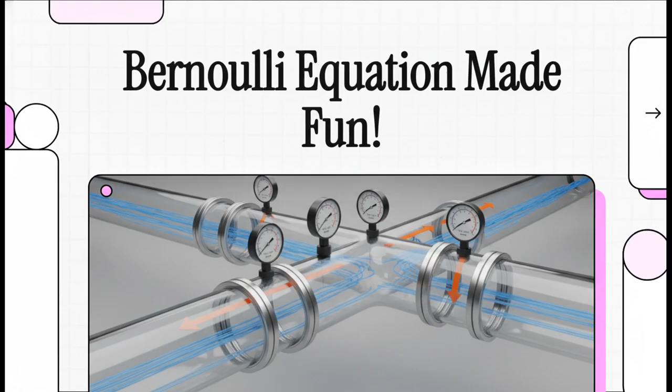Think about this for a second. How does a heavy airplane actually fly? I mean, it's a literal massive metal machine, right? Weighing hundreds of thousands of pounds, packed with people and luggage, and yet it just gracefully lifts off the runway and glides through the air. It kind of feels like magic.

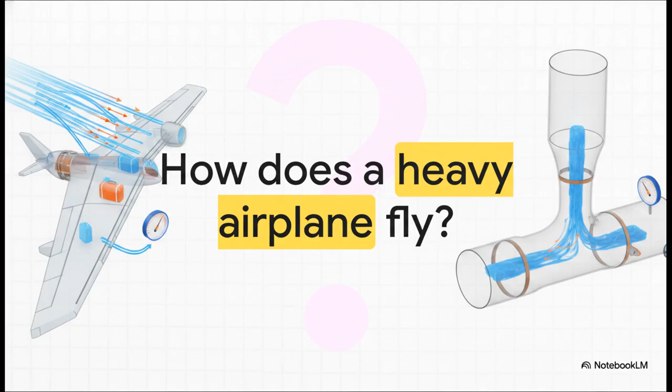But, well, the secret isn't magic at all. It's actually down to a remarkably simple rule of fluids. And the best part? To understand it, we don't even need to step foot in a lab or a wind tunnel. Section 1. The water slide effect. Instead of a lab, I want you to imagine we're heading to a water park. Picture yourself at the very top of a massive water slide.

Now, pay attention to the physical sensations of that ride, because they perfectly map to the three types of energy we're tackling today. So first, you start way up high, right? Just by standing up there at the top of the stairs, you have high potential energy. Then you push off.

As you speed up, rushing down that slide, your kinetic energy, that's your energy of motion, goes up, and all the while, you can physically feel the water pushing around you, right against your body. That push, that's pressure energy. So we've got potential, kinetic, and pressure. Just hold on to those three ideas for me.

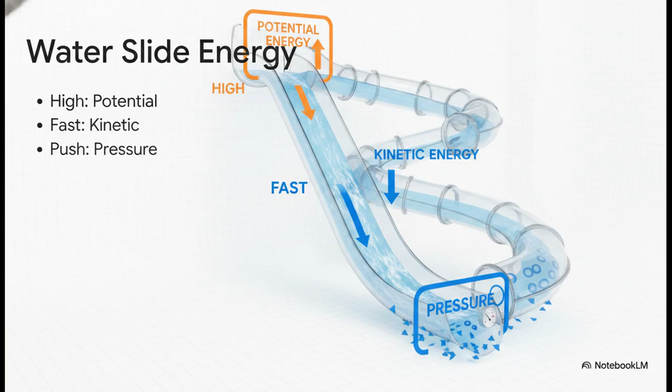And that brings us straight to Bernoulli's equation. In plain English, it just says that the total energy stays exactly the same, as long as no energy is lost. It's kind of like a perfectly balanced budget. On that water slide, your potential energy, your kinetic energy, and your pressure energy, they're constantly shifting and trading places with each other as you twist and drop.

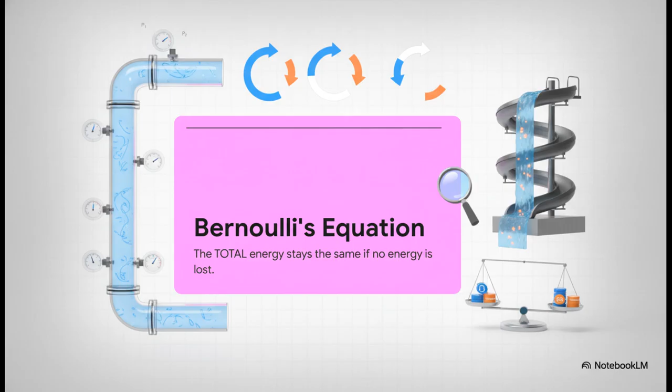But if we pause time and add them all up at any given moment on that slide, the total sum of those energies remains perfectly constant. The whole shebang stays balanced. Which brings us to Section 2, the PVH memory trick.

Now, if you crack open a textbook, you're going to see this terrifying formula: P + ½ρv² + ρgh = constant. Whew, I know, just looking at a bunch of Greek letters and squared variables is enough to make anyone's brain want to shut off. But remember, this massive formula literally just represents the pressure energy, kinetic energy, and potential energy we just felt on the water slide.

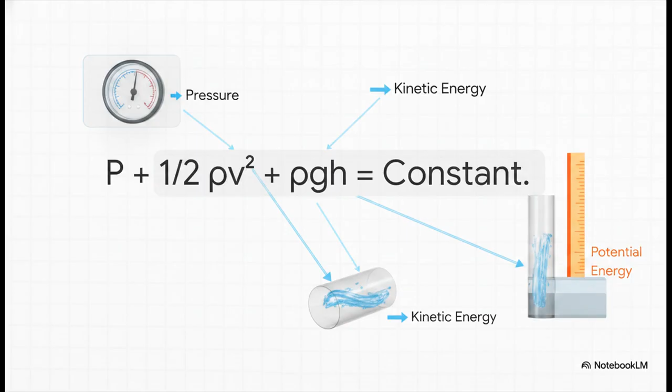And like I promised, we are going to simplify this right now. We are going to ditch the scary algebra and break this down using a super simple memory trick. PVH. P stands for pressure, V stands for velocity, which is really just a fancy word for speed, and H stands for height. PVH. By just focusing on these three straightforward things, pressure, velocity, and height, we can totally understand the physics here without needing an advanced degree.

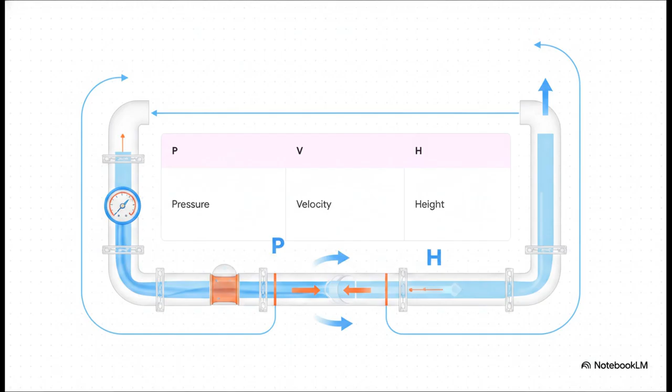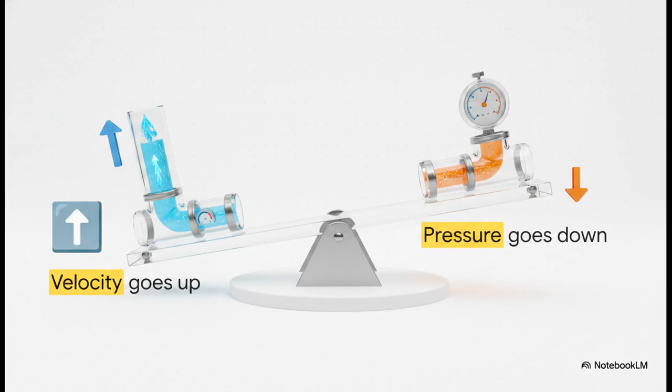So what's really fascinating here is how these three things interact. Remember that balanced budget we talked about? Because the total energy has to stay perfectly constant, these variables act exactly like a seesaw. If one side goes up, another side absolutely must go down to keep the whole thing balanced. So, for example, if your velocity goes up, your pressure goes down. They trade off. It is a constant balancing act.

Section 3. Real-world Bernoulli. Okay, let's step out of the theory for a second and look at a super practical application.

I'm willing to bet almost all of you have actually done this. Step 1, you've got a normal, steady flow of water coming out of a garden hose. Step 2, you decide you want to spray your unsuspecting sibling all the way across the yard. So what do you naturally do? You jam your thumb right over the opening.

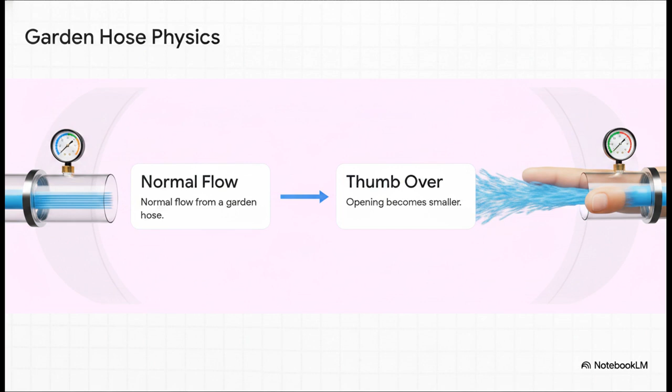Let's think about what physically happens when you do that. This little backyard prank brilliantly illustrates our PVH rule in action. When you put your thumb over the hose, you're making the opening smaller, right? Now, for all that water to still squeeze through, it has to rush out much, much faster. So boom, our velocity just went way up.

But what does our seesaw rule tell us? Here is the absolute crucial point. If the velocity goes up, the pressure has to go down. The water is shooting out way faster, which means the actual pressure right there at the opening drops. Faster velocity means lower pressure, always.

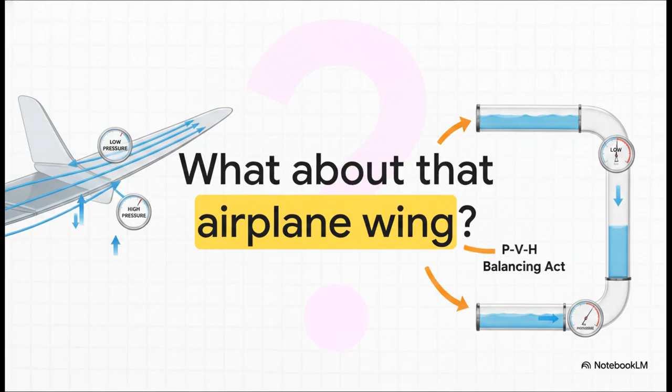So let's bring it all full circle back to our opening mystery. What about that airplane wing? How on earth does this PVH seesaw, the exact same one governing our garden hose, keep a massive metal jet up in the sky? Well, it all boils down to the clever shape of the wing and how it forces the fluid, which in this case is the air, to move.

The way an airplane wing is curved actually forces the air moving over the top to travel faster than the air moving underneath it. So the velocity of the air on top goes up. And thanks to Bernoulli's equation, we know that when velocity goes up, pressure has to go down. This creates a literal zone of lower pressure sitting right above the wing.

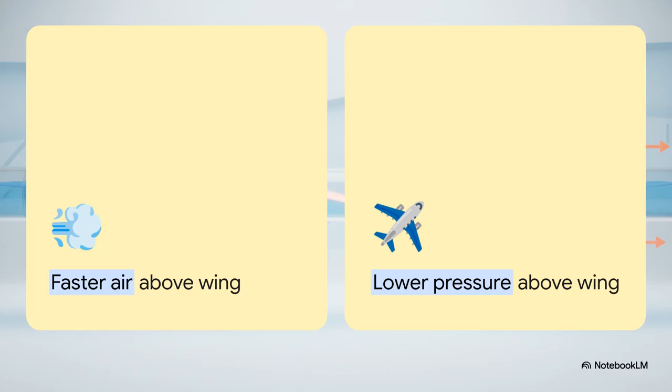Because the pressure under the wing is now relatively higher, it physically pushes the airplane upward into that lower pressure zone. And guys, that is lift. It's literally just trading velocity for pressure. How cool is that? Section 4.

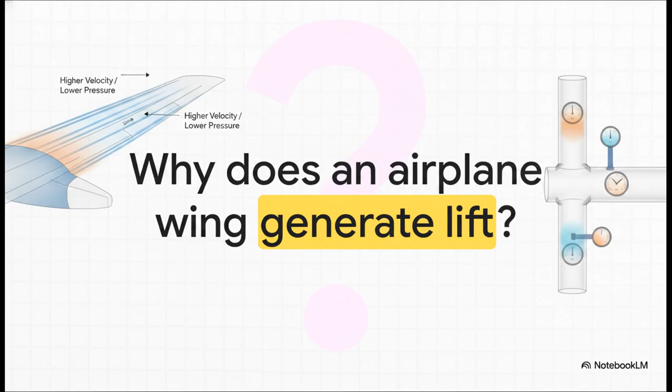Test your fluid knowledge. All right, you've mastered the water slide, the PVH trick, the garden hose, and even airplane wings. So let's make this a little interactive. Quick quiz number 1. Based on everything we just covered, why does an airplane wing generate lift? Think back to that balancing act. I'll give you a second.

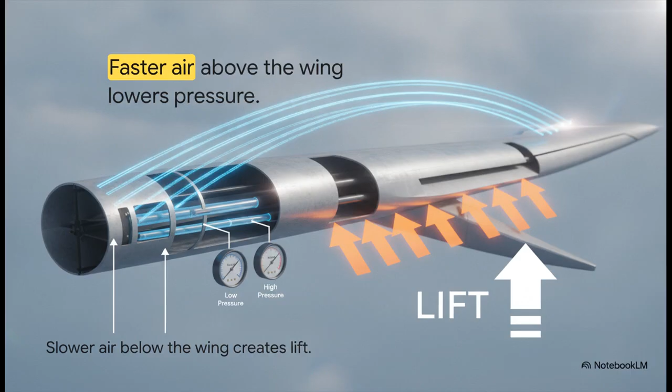Did you get it? It's because the faster air above the wing lowers the pressure. You get that super high velocity over the top, which perfectly trades off for lower pressure. And that allows the higher pressure underneath to just lift the whole plane right up into the sky. Absolutely brilliant. Okay, let's really cement this in with quick quiz number 2.

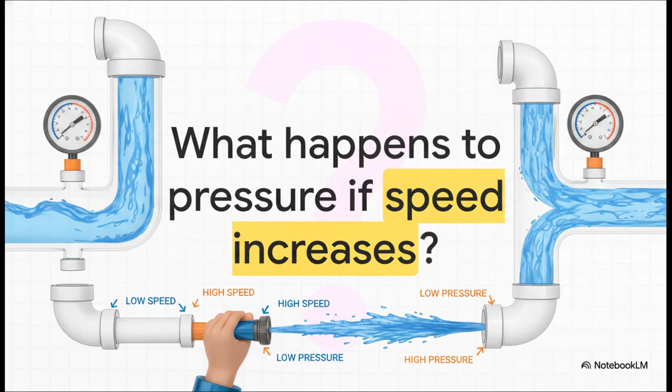What happens to pressure if a fluid's speed or its velocity increases? Think about your thumb over that garden hose. When that water suddenly speeds up to blast your sibling, what happens to the pressure at the opening? Take a guess.

Nailed it. It decreases. It is the ultimate seesaw effect in action. The total energy has to stay constant, so if speed goes way up, pressure absolutely has to go down to maintain the balance. Honestly, you've officially mastered the core of Bernoulli's equation.

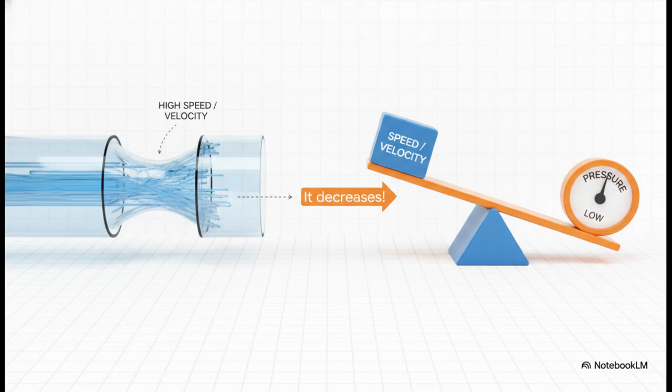Now, I want to leave you with a thought to chew on. Where else is this PVH balance happening in the world around you right this very second? Because once you grasp that velocity and pressure are constantly doing this intricate little dance to keep energy balanced, I promise you, you're going to start seeing it everywhere.

From the way the wind howls as it squeezes through a narrow alleyway, to how your shower curtain mysteriously gets sucked inward when you turn on the hot water. It is all the exact same beautiful physics. So keep your eyes open for it out there.